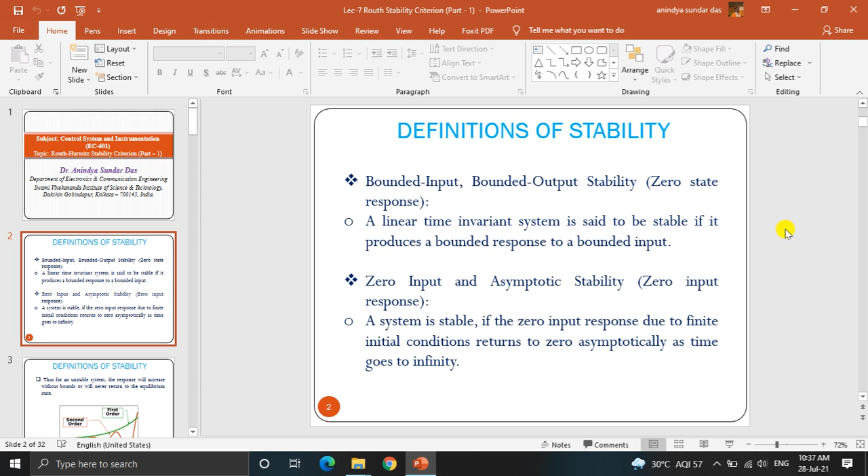Now, first of all, let me tell you about the definition of stability of a system. A system is said to be stable if it produces a bounded response to a bounded input. When the initial conditions are zero, that is called zero state response.

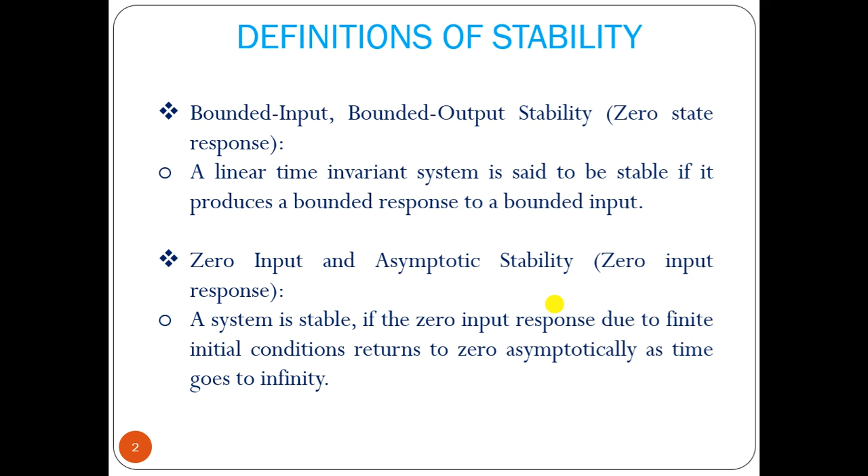And there is another definition: a system is stable if the zero input response due to finite initial conditions returns to zero asymptotically as time goes to infinity. That is called zero input response. That means we have applied a zero input, but due to the initial conditions, the output of the system returns to zero as time goes to infinity.

So these are the two definitions of stability of a linear system, and according to the waveform or response of the output, for an unstable system the response will increase without bounds and will never return to equilibrium state. For a first order system, it will start increasing, and as time goes to infinity, the output response value should go to infinity.

If it is second order or a higher order system, it starts oscillating and the amplitude is increasing with respect to time, and as time goes to infinity, the value may reach infinity. Then we can say the system is unstable.

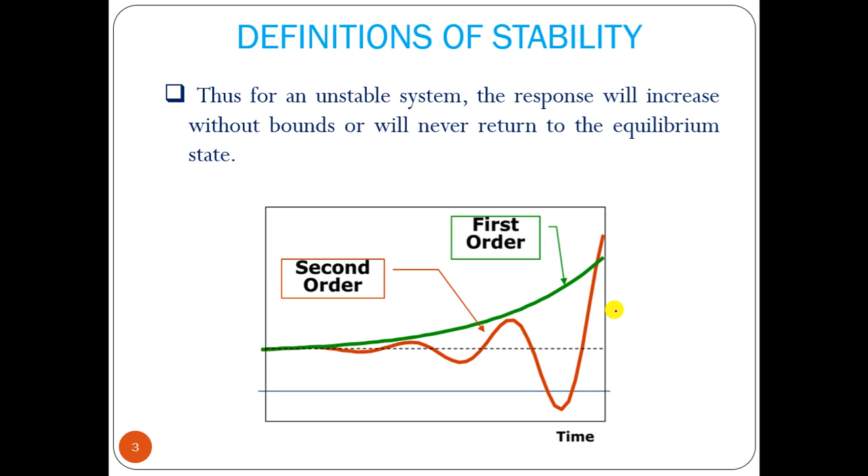Now, to find out the stability, what we require is the transfer function of the system for a linear system, written as Laplace of output to Laplace of input. So we have two polynomials, numerator and denominator, written in this particular form. The order of the system is the maximum power of s in the denominator, and denominator polynomial equal to 0 is known as the characteristic equation, denoted D(s), known as the characteristic polynomial.

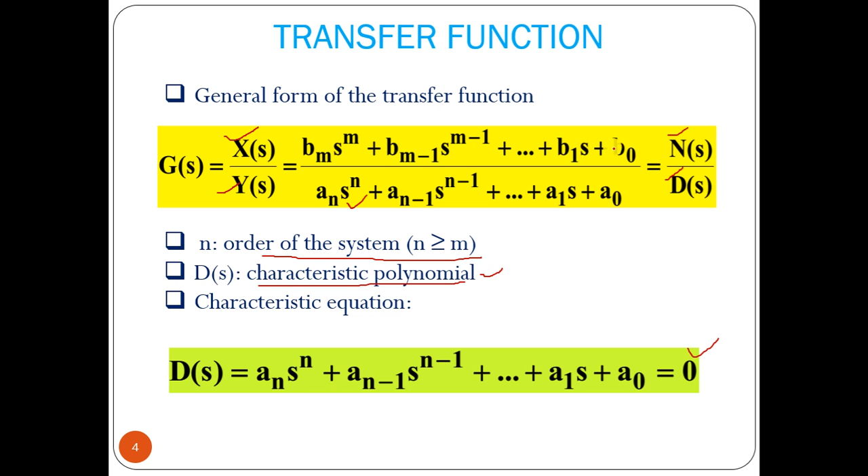Now the roots of the numerator polynomial are called the zeros of the system, because if we put the roots of numerator value in the transfer function, the transfer function becomes 0. The roots of the denominator polynomial are called the poles of the system, that means if we put the pole value in the transfer function, the system output becomes infinity. That's why these poles make our system output equal to infinity, the transfer function value goes to infinity.

That's why poles are the main factor for stability of the system. Now stability of a linear time invariant system is a property of the system and is independent of its input. It can be shown that the positions of the roots of the characteristic equation, that is the poles of the transfer function in the complex plane, determine the stability of the system. If all the roots are on the left side of the complex S plane, that is all roots have negative real parts, then the system is stable.

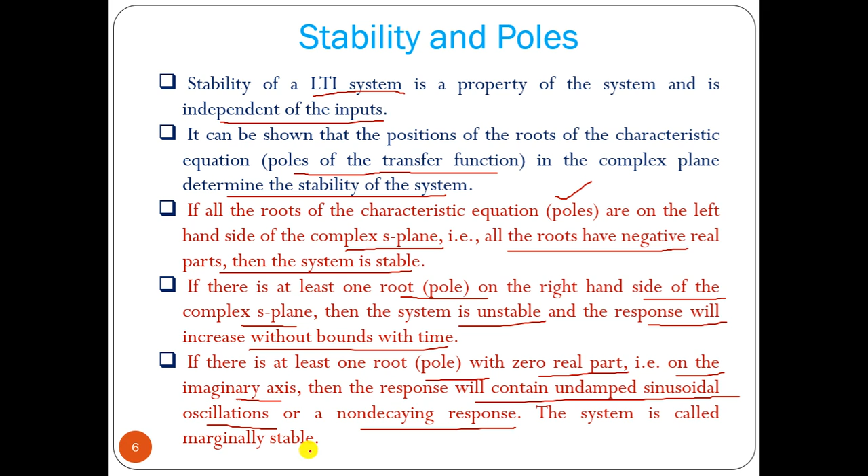If there is at least one root or pole on the right hand side of the S plane, then the system is unstable and the response will increase without bounds with time. If there is at least one root or pole with zero real part, lying on the imaginary axis, then the response will contain undamped sinusoidal oscillations, or a non-decaying response. Then the system is called a marginally stable system.

For example, let me show you. This is the S plane where S equals sigma plus j omega, and we have a pole on the left half of the S plane. So the characteristic equation, I mean the transfer function, we can write as some constant divided by S plus A. If you put S plus A equal to 0, the characteristic equation, then S equals minus A.

Now if you convert that transfer function A by S plus A and take the Laplace inverse, the expression will be A times e to the power minus AT. So the response is decaying, exponentially decaying. So the system is a stable system.

Now if we have a pole on the right half plane of the system, then if you take the transfer function as A by S minus A, and take the Laplace inverse, the response will be A times e to the power plus AT. That means exponentially increasing, so it is not a bounded output with time. So that impulse response is exponentially increasing, so it is an unstable system.

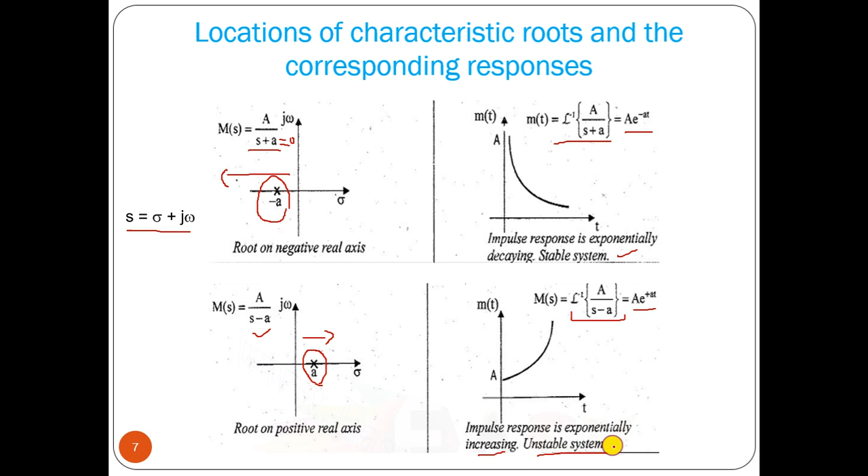Now let us take the example of a complex pole with complex conjugate roots. The transfer function is a divided by (s plus a plus jb) plus a star divided by (s plus a minus jb). So we have poles at minus a plus minus jb. Now if you take the Laplace inverse of that transfer function, here's what you get.

You get 2a times e to the power minus at, times sine of bt plus 90 degrees. Here we have a sine term, but it is multiplied with an exponentially decaying function, e to the power minus at. So the magnitude, the amplitude of that signal, is decreasing with respect to time. That response is a damped sinusoidal signal, damped because of the factor e to the power minus at. So the output response is going to decay and reach the steady state value. So it is called a stable system.

Now if we have poles on the right half plane, complex pole, the transfer function is a divided by (s minus a plus jb) plus a star divided by (s minus a minus jb). If we take the Laplace inverse of that, we get an expression with e to the power at, multiplied with a sine term. E to the power at means it is exponentially increasing, so the amplitude of the signal will be increasing with respect to time. So the system becomes unstable, because at t equal to infinity, the amplitude value may reach infinity.

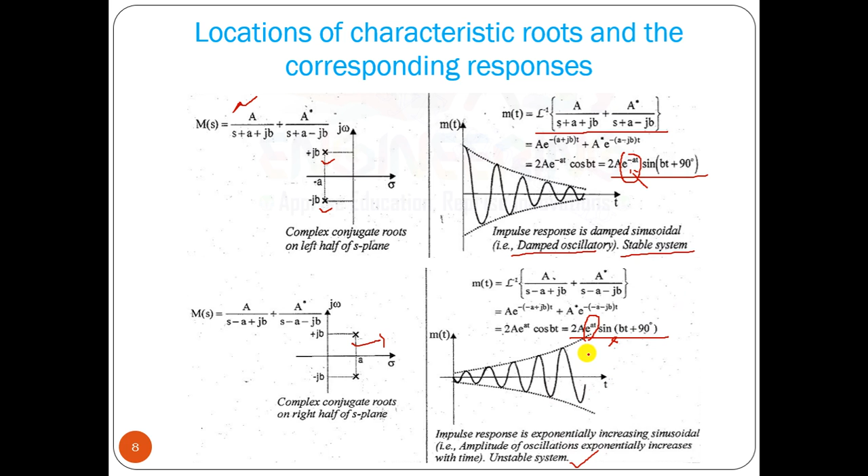Now if we have a complex pole on the imaginary axis, that means real part equal to zero. The transfer function is a divided by (s plus jb) plus a star divided by (s minus jb). If you take the Laplace inverse of that particular term, what you get is 2a sine of bt plus 90 degrees. Now this is only a sine function, so it will be completely oscillatory in nature — that is called a marginally stable system.

Now if we have a complex pole on the imaginary axis as a multiple pole, double pair of roots on the imaginary axis, that means a divided by (s plus jb) squared plus a star divided by (s minus jb) squared. If you take the Laplace inverse of this transfer function, what you get is 2a times t, times sine of bt plus 90 degrees. Now this term t is nothing but a ramp function, multiplied with the sine factor. So its magnitude will be increasing with respect to time, and the output becomes unbounded.

So that means if we have a single pair of roots on the imaginary axis, the system is marginally stable. If we have a double pair of roots on the imaginary axis, the system will be unstable.

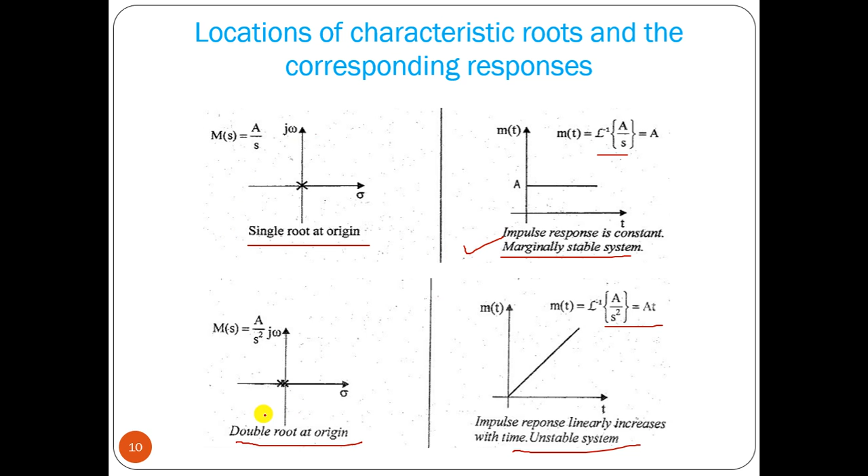So if we have a single root at the origin, it is a marginally stable system. If we have a double root at the origin, it will be an unstable system. These are the factors that we have to remember.

So if we have a pole on the imaginary axis, it will be completely oscillatory. And as it moves away, the frequency will be higher. If the pole is on the right hand side, the system will be unstable. On the left hand side, the system will be stable. And as we go further away from the imaginary axis on the left hand side, the response will be faster — it reaches the steady state value faster than if it is close to the imaginary axis.

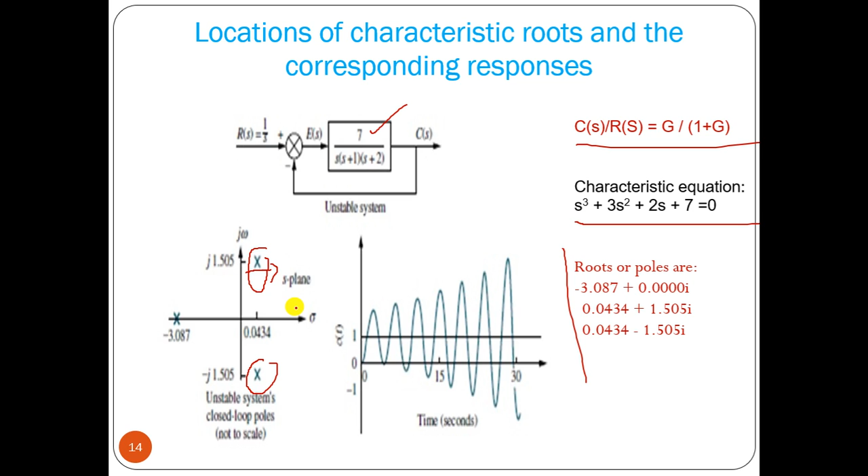Now if we have another transfer function, the characteristic equation is this one. If you solve this using the formula G over 1 plus G, since H equals 1 here, we can find the roots. Plotting them, we see poles on the right half of the plane, so the system will be unstable. If we find its response, the magnitude is increasing with respect to time, and as t goes to infinity, the response can go to infinity.

So the system is unstable. This is how we can find out stability. For first, second, or third order systems, it is very easy to find the roots of the characteristic equation or the pole values. But for a fourth order system or more, say sixth order, it becomes very difficult to find the roots by pen and paper calculation. We have to use a computer for that.

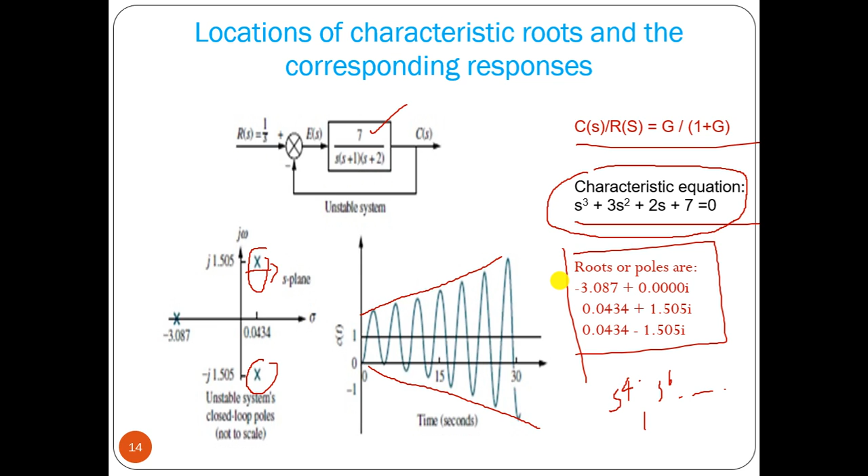But there is another method that lets us solve higher order systems easily using pen and paper. That method is known as the Routh-Hurwitz stability criterion. This is a direct approach to determine the stability of the system, used when the characteristic equations are large and complex. We apply this Routh-Hurwitz criterion because it is difficult to simplify them into roots if the order is 4 and above.

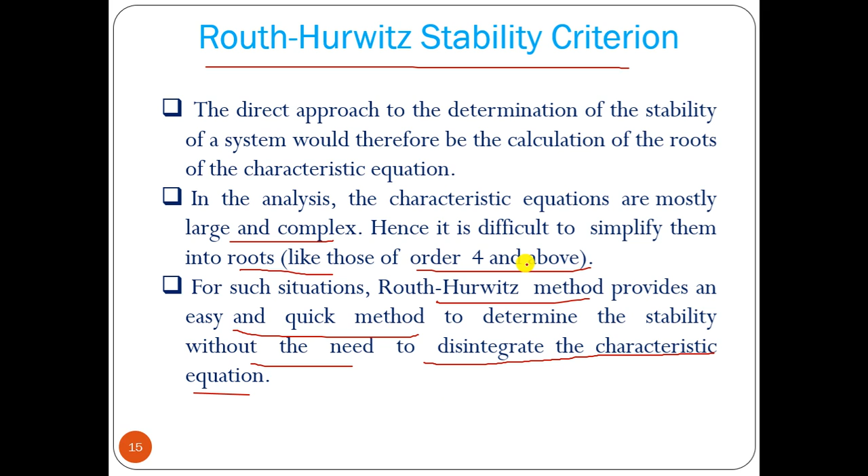For such situations, the Routh-Hurwitz method provides an easy and quick way to determine stability without the need to solve the characteristic equation for its roots. That means without calculating the value of poles, we can find the stability of the system using this Routh-Hurwitz stability criterion. This was introduced by Edward John Routh in the year 1876.

In this method we form a table called the Routh table. The Routh stability criterion allows determination of whether there are any roots of the characteristic equation with positive real part, and if so, how many such roots there are, without actually finding the roots. That means using the Routh stability criteria we can find how many roots are in the right half of the plane.

We can find the number of roots, whether there is one, two, or three roots in the right half plane, without finding the actual value of the roots. The Routh-Hurwitz criterion states that the number of roots of the characteristic equation with positive real parts, that is, lying on the right half of the plane, is equal to the number of changes in sign of the first column of the Routh array.

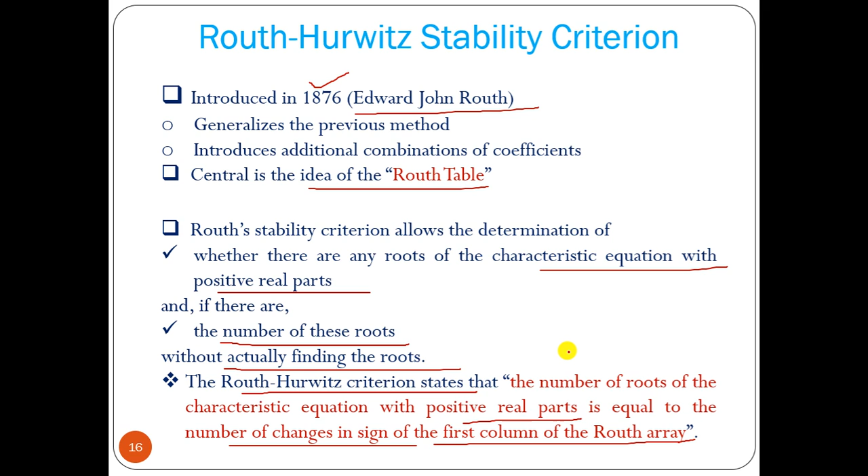First, let us construct the Routh table. Then we can understand this concept very easily.

The first step in checking the stability of a system using the Routh stability criterion is the application of an initial test called the Hurwitz test. What is the meaning of the Hurwitz test? The necessary but not sufficient condition for a characteristic equation to have all its roots with negative real parts is that all of the coefficients must exist and have the same sign. This is the Hurwitz test. If the characteristic equation fails to meet this condition, the system is not stable.

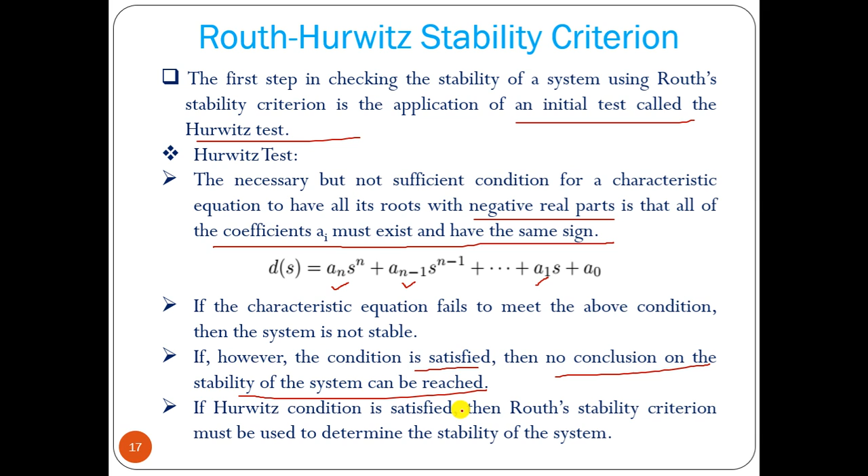That means we must have all the coefficients of S present. If there is a missing term, the system is unstable. That is a necessary condition, but not a sufficient one. If the condition is satisfied, no conclusion on the stability of the system can be reached; for that we have to apply the Routh stability criterion. To apply it, a Routh array or Routh table must be constructed.

We have to construct it from the characteristic equation, or the denominator polynomial. This is the form of the denominator polynomial, with these being the coefficients, the values of coefficient a, and s to the power n.

Now we have to write the coefficients in two rows. The first row starts with a n, the second row starts with a n minus 1. The other coefficients alternate between the two rows. Both rows should be the same length. We continue until no coefficients are left, otherwise we add 0 as the last coefficient if necessary. So this is how we construct the two rows.

Let me show you how we can put in the values. Say, for example, this is your denominator polynomial, a fourth order system, s to the power 4, so a4. We have to take a column where we put values from the maximum value of s to the minimum value, s4 to s0.

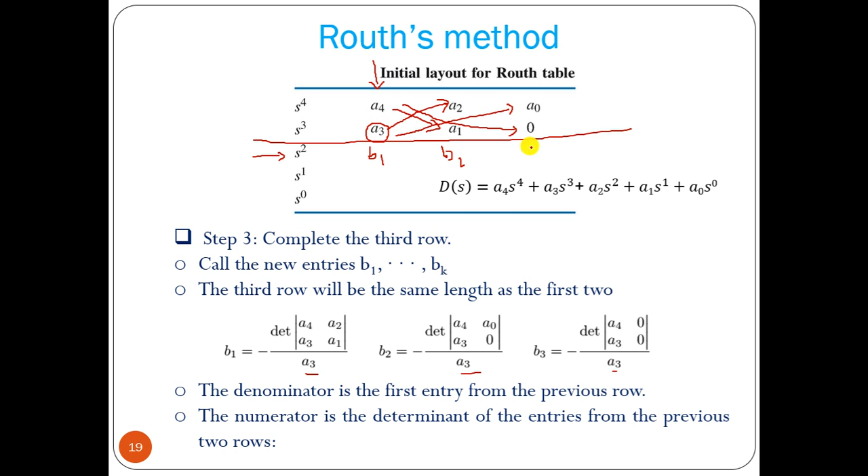Second value, what will it be? With respect to the first column we take A4, A3, then the next column value: A3 into A0, minus A4 into 0, divided by A3. In the first column, we take the last row value as the divisor, so A3 is the common factor. So we get this B2, and since we don't have any value here, that will be 0. This is how we find out the third row.

Now this is the way we follow for the next row. To find the value of this row, we take the previous two rows and apply the same method: B1 into A1, minus A3 into B2, divided by B1. Then B1 into 0, minus A3 into 0, divided by B1, in the same way.

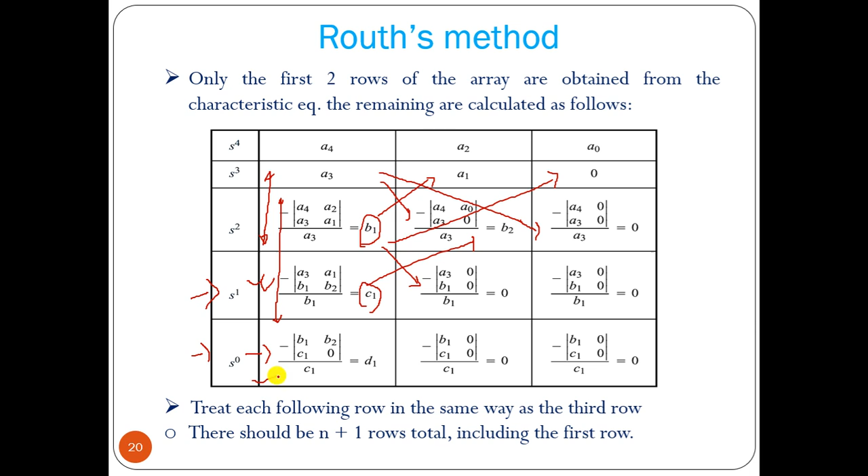Now if we compute this row, we consider the previous two row values: C1 into B2, minus B1 into 0, divided by C1. That will be your D1. This is how we find all the coefficient values.

So let us take an example. This is your characteristic equation, starting with s cubed, so we can start from s cube up to s0. What is the order of the system? If this is n, how many rows should there be? That should be n plus 1, because we go down to s to the power 0. Now we put all the coefficient values alternately: 1, then 10, 31, then 1030.

These values are 0, so alternately you have to place them. Then you have to calculate: 10, 1030, we can divide this row by 10, so we get 103. So what we can do? 1 into 31, 1 into 103 divided by 1.

1 into 31 minus 1 into 103, so it will be minus 72. Then this will be 0. Now we got this value.

Now we have to find the next row, taking the last two rows. Whichever row you have to calculate, we have to take the two rows before it. So 72 into 103, 1 into 0, divided by minus 72, that will be 103. So that will be the Routh table. Now from that, what do we have to do?

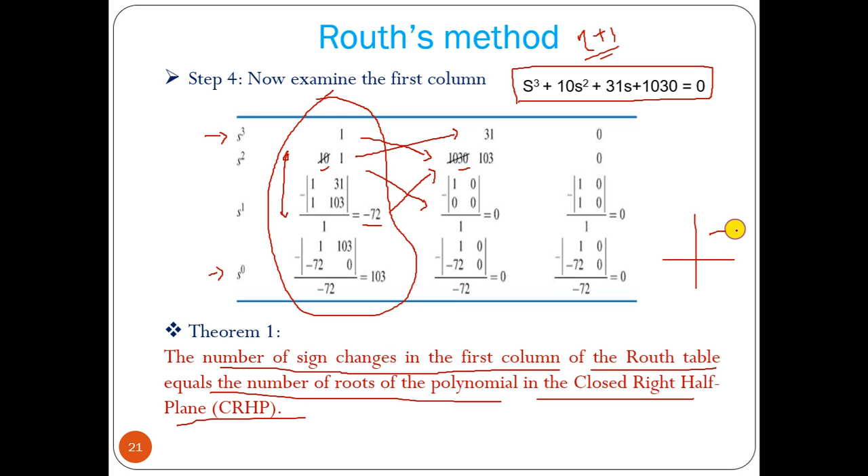How can we find out the stability criterion? The stability criterion states that the number of sign changes in the first column is the main factor. If in the first column there are sign changes, the number of sign changes of the roots in the first column of the Routh table equals the number of roots of the polynomial in the closed right half plane, meaning the poles are present in the right half plane of the S plane. So we have to look for sign changes in the first column.

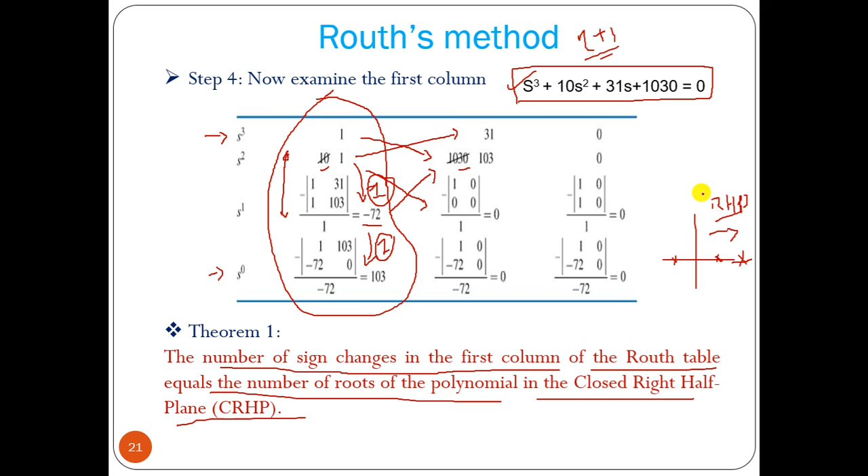Now you can see plus 1, minus 72, 103. So plus to minus, there is one sign change. Then from minus to plus, there is another sign change. So we have two sign changes. That means the system is unstable and two poles are present on the right half plane. So one pole should be on the left half plane, because this is a third order system, so we must have three poles. So the system is unstable. This is the way we can find out.

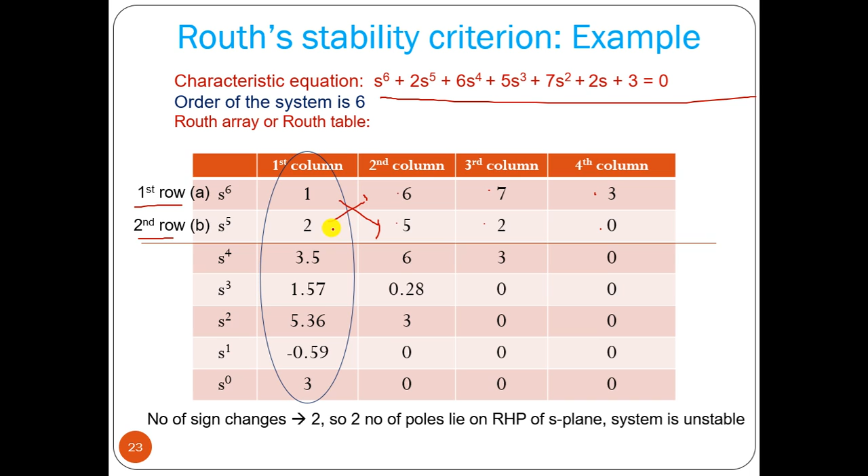Next we can find the next value taking the previous two rows into consideration. So 3.5 into 5 minus 2 into 6, divided by 3.5, this is the value. Similarly, 3.5 into 2 minus 2 into 3, divided by 3.5, we get the next value. So in that way we can solve to get all the coefficient values.

Then we can see there is a plus to minus sign change, and a minus to plus sign change, so we have two poles on the right half plane. How many poles are on the left half plane? The number of poles on the left half plane is 4, because the maximum power is 6, so 6 poles should be there. 2 on the right half plane, so 4 poles should be on the left half plane. As there are 2 poles on the right half plane, the system is unstable.

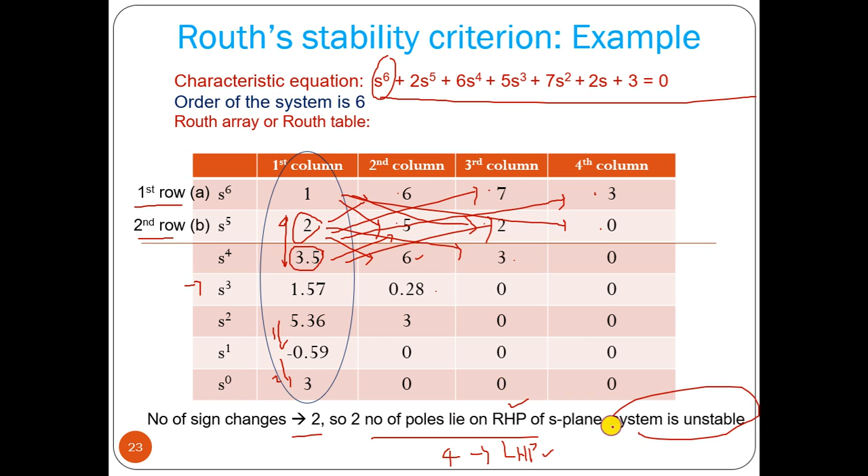Now let us solve a very important method, that is how we can find out the condition. Let us check for a quadratic, I mean a second order system where we have a quadratic equation.

Second order system, s to the power 2. This is the formula to find out the pole. What we can do, s square plus bs plus c equal to 0 is the characteristic equation. So we have s square, s and s to the power 0. We can put the coefficient values 1, b, c, 0, other terms as 0.

Now we can find out b into c minus 0 divided by b, that will be c. Now we have to look at the first column. So what is the condition for stability of the system? The condition is your b value must be greater than 0. B value must be greater than 0, right? Then only it will be a positive value.

If it is less than 0, it will be negative, then the system will be unstable because there will be a sign change. And C value should be greater than 0 also. Then what happens? If B, C both are greater than 0, then the system is stable. So both coefficients should be positive.

Now suppose if we have C positive and... is negative, what will happen? There is only one sign change, right? Plus to minus, that means one pole on the right half plane of the S plane, system becomes unstable. If we have B also negative, then plus to minus, minus to minus, so one sign change, system is unstable. So the condition is B, C coefficients must be positive for a quadratic second order system.

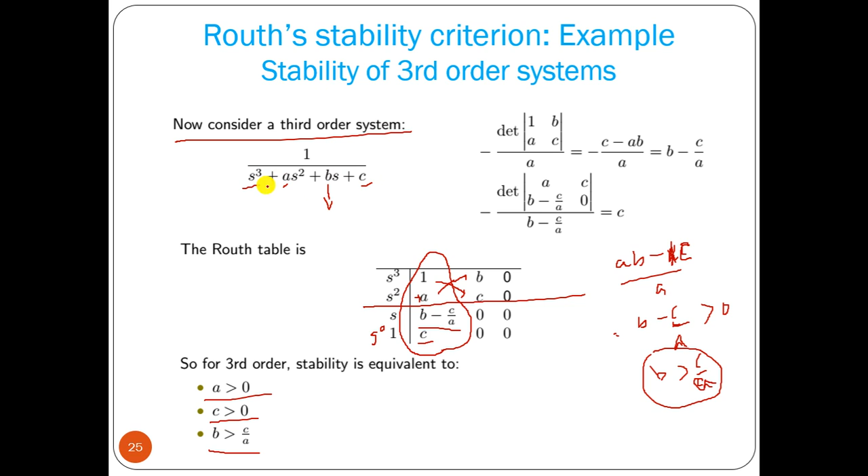So b should be greater than c by a. That means whatever the value of b is, that must be greater than c by a, then only the system will be stable. So this is how we can find out the condition for any system's stability. For second order and third order, I have taken these two examples. Now let us solve one question.

First example, and this is your G(s). This is a stable transfer function. You can see we have all the poles on the left half plane, s equal to -2, -3, -5.

Now we have included one controller variable, 1000. Instead of having this one, we are inserting a controller gain factor as 1000. So this closed loop transfer function, if you want to find out, that will be this value using the formula G divided by 1 plus GH. Here H equals 1. So G divided by 1 plus this factor.

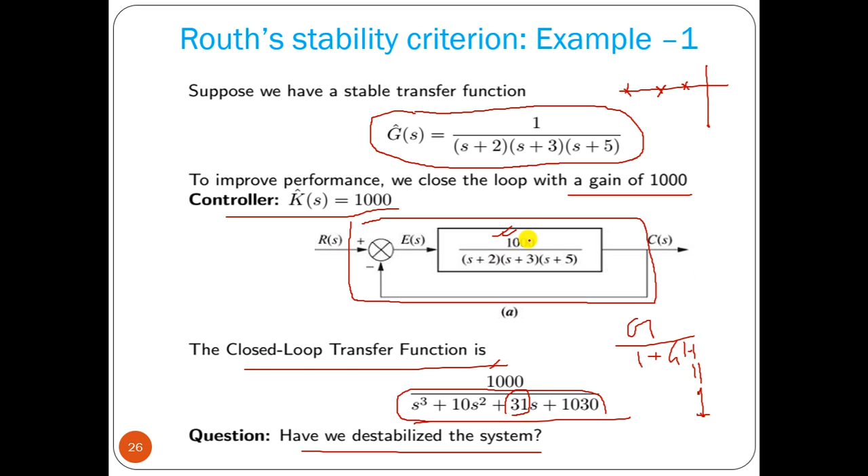So what we are getting? We are destabilizing the system. It is a stable system, but if we insert a gain of 1000 and give negative feedback, the system becomes unstable. But it doesn't mean that feedback is destabilizing. What happens because of this third order factor? The condition is B should be greater than C by A. So this factor makes your system unstable. Why? Because this 1000, this proportional constant, this constant value, is much higher. If you reduce that value, then we can get your system stable. That is the point.

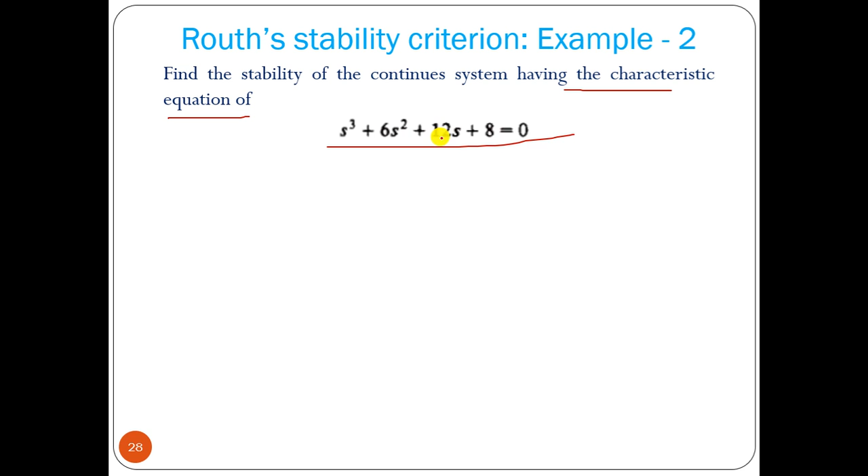Let us prove that. So S cube, S square, we have to put all the coefficient values alternately: 1, then 6, 12, then 8. Now we can find out the S1, S0 factor. It is 6 into 12 minus 8, divided by 6, equals 64 by 6. Then this is 0. Now this one into 8 minus this 0, divided by this factor, so it will be 8. Now we can see from this first column there is no sign change, so what we can say is the system is stable, all the roots are on the left half of the s-plane.

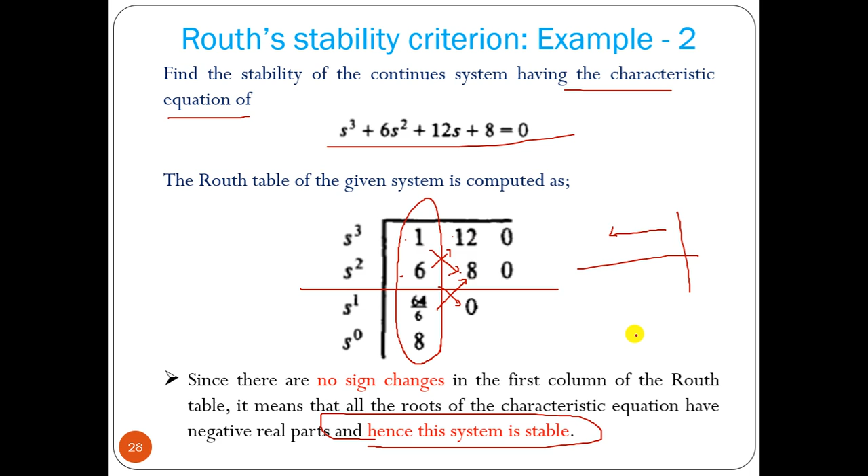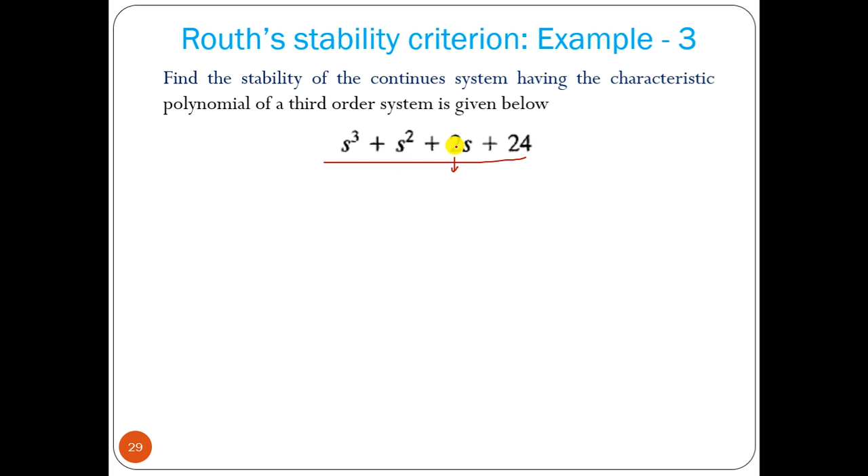Now, another problem. What we can see here is this is a third order system. A, B, C all greater than 0, but this B value should be greater than C by A. Now this is less than that, so the system must be unstable. We can check using this Routh stability criteria. That is S cube, S square, first two rows we have to put all the coefficient values: 1, 1, 2, 24. If we multiply these two factors, 2 minus 24 by 1, minus 22.

Now minus 22 into 24 minus 0, divided by minus 22, is 24. Now what we can see here, we can see plus to minus 1 sign change, minus to plus second sign change. So two sign changes are there, so two poles lie on the right half plane, and one pole lies on the left half plane. So as two poles lie on the right half plane, the system becomes unstable. But we can find out the condition from the condition itself that we solved for the third order system.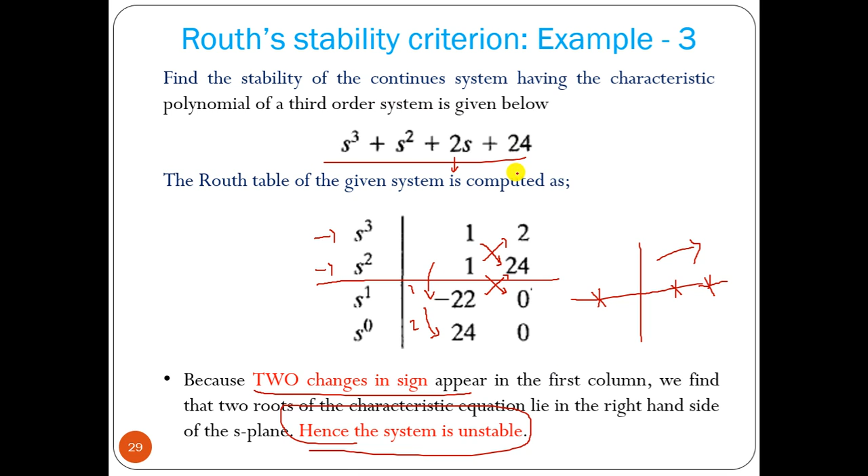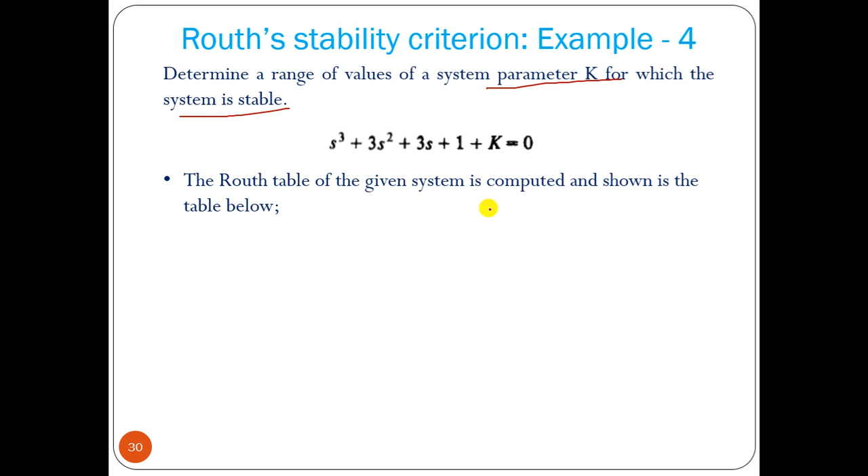Now let us look at another type of problem: determine the range of values of a system parameter K. We have a system parameter K, and we have to find out its range for which the system is stable. For that we can form the Routh table. So S cube is the factor, S square, alternately you write the coefficients 1, 3, 3, and this is your constant. Instead of having one simple constant C, we have one with a K term.

Now we can vary K so that the system will be stable. That is the controller - what is the use of a controller, I will cover later. Now we can calculate: 3 into 3 is 9, minus 1 minus K, so 8 minus K by 3, this factor is 0. Now this one into 1 plus K, minus 0, divided by this factor, so it will be 1 plus K. Now we have to find out the condition. So this column, for stability, must be positive - all values should be positive, there should not be any sign change. So what we can say is that 1 plus K must be greater than 0, right?

Then only it will be positive. This factor 8 minus k by 3 should be also greater than 0. That means 8 minus k should be greater than 0. So from this factor, k must be greater than minus 1, and from this factor, k must be less than 8.

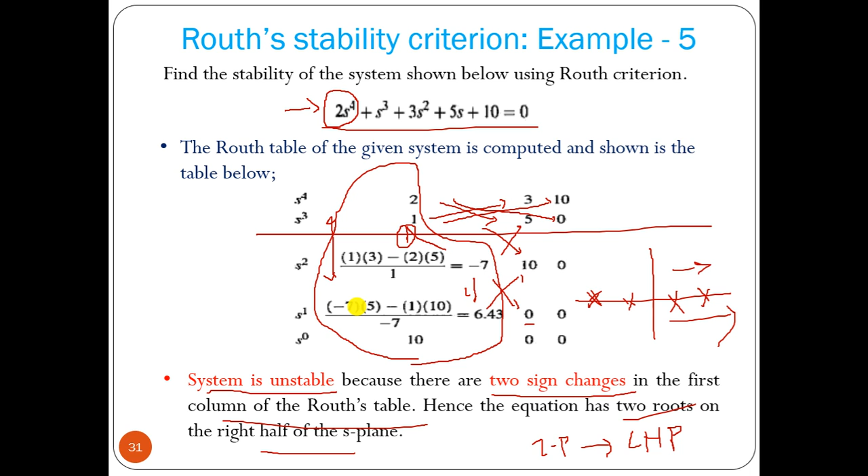So this is all about this Routh stability criterion, how to construct the Routh table, then what is the condition for stability, and what we can find out. Now there are some points in this Routh stability criterion topic, what may happen is that in one particular column.

What we can have is that during construction of the Routh table, we have some values here, say in first two rows we have some values. What may happen is that in one row, the first column value becomes 0 and we have some other column value. One first column value of a row becomes 0.

It can happen. How? Because say this is 1, 1, this is 1, 1. So 1 into 1 minus 1 into 1, divided by 1, it will be 0. If this happens and other row values become non-zero, then we cannot solve it directly. So we have to do some process to solve it, find out stability, and how many poles are there on the right half plane.

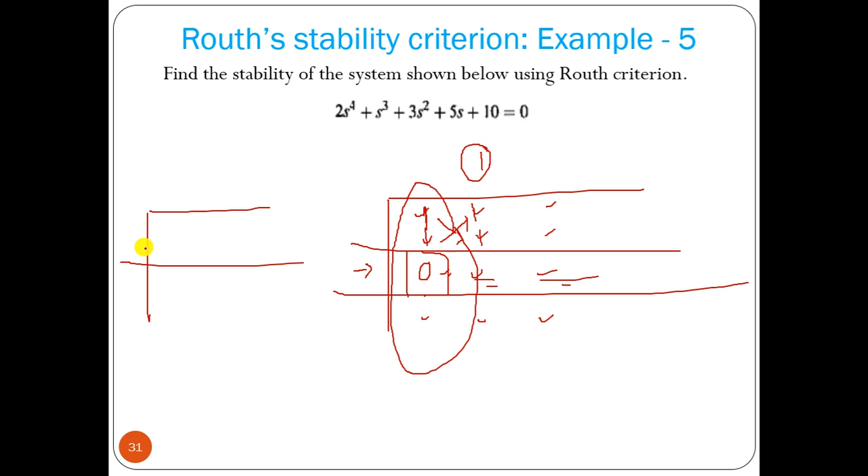This is the first case that we have to look into, and we can have another case, that is in first two rows we have some values, and what happens, one of the rows, the entire row, can become 0. Here one element, first column element becomes 0 in one row, other elements are non-zero. That is case 1. Case 2 is the entire row becomes 0. Then what will happen? That is case 2.

So in the next lecture I will discuss about these two cases, how we can solve it and what conclusion we can make. Okay, so thank you so much.